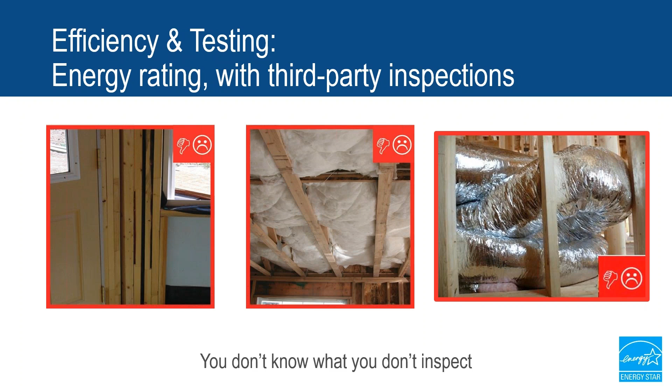Hopefully you're already familiar with ratings, but if you're not, here are the very basic steps as they apply to Energy Star. The third-party inspector, again called the rater, completes a preliminary energy model and Energy Star design review before construction even begins. During construction, the rater completes 2 on-site inspections to complete what is called an Energy Rating Index or ERI rating, and to verify additional Energy Star specific requirements.

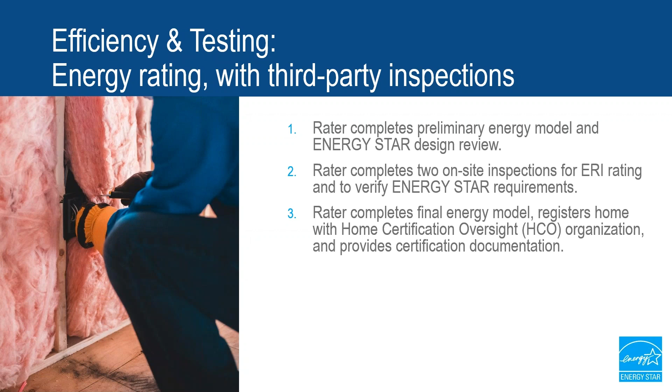Finally, the rater completes the energy model. They register the home with their Home Certification Oversight Organization, or HCO, and they provide documentation of certification to the builder. So doing an energy rating is an easy but critical first step. Every builder can, and I think should be doing an energy rating, otherwise you're just flying blind.

Fortunately, we know that a lot of builders have already taken this first step. More than 360,000 homes were rated in 2023 alone. Those were almost entirely new construction. Now, as I mentioned, these ratings result in an energy rating index, or ERI score, that represents the relative efficiency of a home. This is a scale roughly 0 to 100.

A high score represents a home that uses a lot of energy, meaning it's not efficient. And like golf, the lower the score, the better. A low ERI rating means the home uses less energy and is relatively more efficient. So for context, an ERI of 100 is equivalent to a home that meets the 2006 International Energy Conservation Code. And a score of 0 represents a home that uses no more energy than it produces. That means you can only achieve a score of 0 if the home has on-site power production like PV panels.

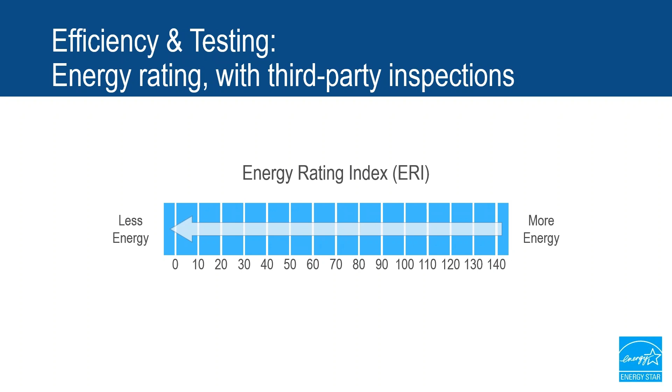In other words, an energy rating is simply an assessment. While it's a critical first step, it doesn't necessarily mean that the home is efficient. For example, a terrible home can also get an energy rating. It might get a score of 130. That's better than not knowing it's 130, but it doesn't necessarily make a good home.

Because of that, the Energy Star program goes beyond just doing an energy rating. We lock in above code performance. And in most states, we do this using what we call an Energy Star ERI target for each home. And this is important. Energy rating software will automatically determine this target for each home. Let me quickly show you how that's done.

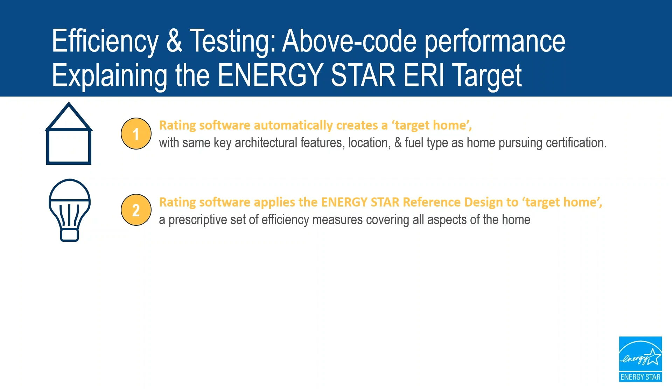Once the house pursuing certification is entered into rating software, the software automatically creates a target home with the same key architectural features like foundation type, conditioned floor area, number of stories, and orientation, as well as the same geographic location and fuel type. Next, the rating software applies what we call the Energy Star reference design to that target home. The Energy Star reference design is a prescriptive set of efficiency measures covering the house from top to bottom: insulation levels, infiltration, duct location, equipment appliance efficiency, etc.

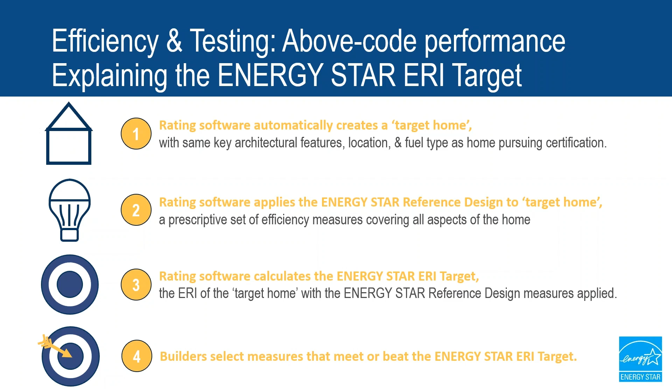Step 3, the rating software calculates the Energy Star ERI target, which is the ERI that results from the target home configured with that Energy Star reference design. Once the ERI target has been calculated, builders then select efficiency measures that meet or beat that ERI target. Note that this is the same process that the Zero Energy Ready Homes program uses to define its performance target as well.

So for example, let's say that you model a home you want to certify, and the software calculates that the Energy Star ERI target for that specific home is a 52. You then have to select efficiency measures that meet or beat 52 for this particular home to be certified. So none of those Energy Star reference design measures are mandatory for hitting the target, but if you're not going to use those, then you have to select other measures to compensate.

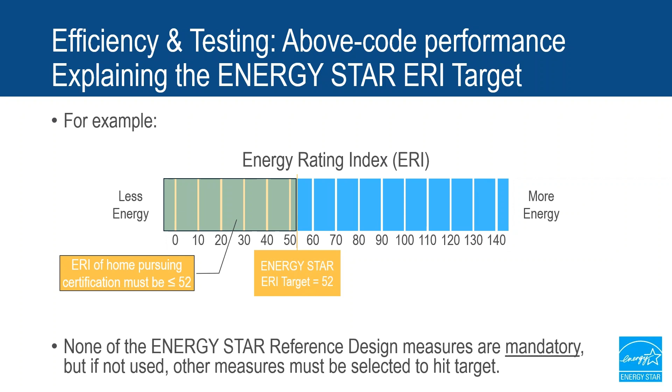So what are the typical Energy Star ERI targets? That depends on the program version. Our goal is to define targets that produce savings of at least 10% relative to code-built homes. For most states, single-family new homes, National Version 3.1 is in effect. These are the states shown in blue. It requires an ERI target of about 55 to 65 for most homes.

National Version 3.2, which is what we're focused on today, is implemented in states that have adopted the 2021 IECC or an equally rigorous code. Those are shown in yellow. Additional states will move to National 3.2 if they adopt the 2021 code, as we discussed. It will also be required in most states starting in 2025 if you want to step up to the tax credit. Now, 3.2 has a more stringent ERI target of about 45 to 55 for most homes.

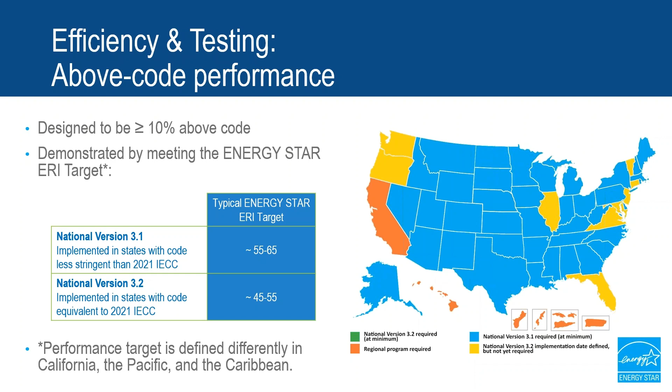And finally, some states have customized performance targets due to unique codes or building practices, and those are shown in orange, for example, California and Hawaii. So that is the foundation of the program, above code performance that's demonstrated through a third-party rating. If you're already doing that as a builder, you're more than halfway towards certification. On top of the efficiency that's locked in, we're just adding a handful of extra features. We're adding 3 comfort features.

The first is a complete thermal enclosure system, and that means a few things. First, having high enough insulation R values and high-performing windows to be effective. That's what we call the thermal backstop, and I'll talk more about that later in the presentation, so remember that term. Second, it means achieving grade 1 insulation installation. This helps a builder get the R value that they paid for and reduces the chances of comfort complaints. Third, it means air barriers and air sealing to help the insulation work properly, reduce hot and cold air from intruding into the home, and reduce pests. And fourth, it means using strategies to reduce thermal bridging in your walls.

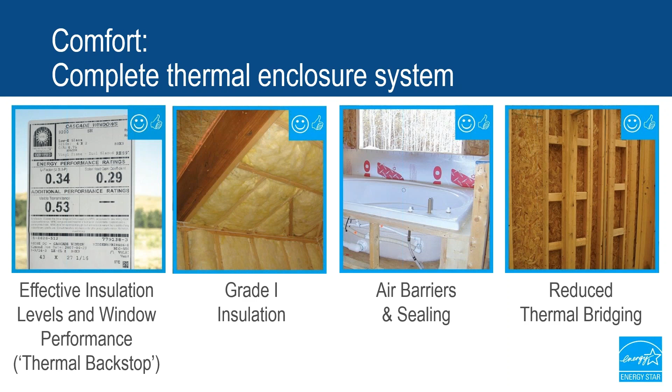The second of the comfort features is properly sized and installed HVAC systems. Unfortunately, this just cannot be taken for granted. Studies have shown that there's improper airflow in nearly 50% of systems, and incorrect refrigerant charge in 60 to 80% of systems. So pretty shocking statistics. You can't just assume that everything is okay. You actually need to check this.

Now, there are a few ways to accomplish this in the Energy Star program, but the best way is through HVAC grading. That's a series of 5 tasks that the rater completes, resulting in a grade for the HVAC system, either 1 meaning great, 2 meaning okay, or 3 meaning not great. You could say bad. For Energy Star, you have to achieve grade 1 or 2.

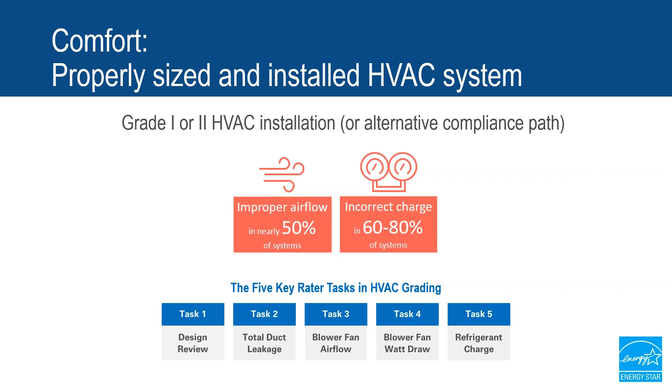The third comfort feature is bedrooms that are comfort balanced. You know, homeowners spend more time in their bedrooms than almost any other room, and when bedroom doors are closed, as they often are, air can become trapped. So it's not enough to supply conditioned air to each bedroom. That air also needs a path back to the HVAC system. There's a variety of ways to create a return air pathway, such as a transfer grill, jump ducts, dedicated returns, or, not as recommended, something as simple as undercut doors.

You know, there's a builder who we worked with for over 10 years who resisted this particular feature tooth and nail. They just didn't believe in the value of it. And then at some point, their in-house HVAC design team realized their HVAC systems just would not work as expected without the return air pathway. And so they ended up incorporating this feature into all of their homes nationwide, even when they weren't doing Energy Star. So this is actually important.

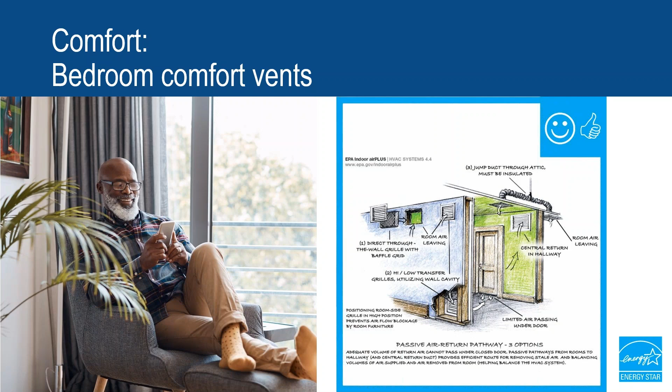We're adding, in addition to those comfort features, 4 air quality features, which are more valuable now than ever before. Because we're building a high performance home, we're going to build it tight and ventilate it right. And that means that we'll add a whole house fresh air system to deliver a consistent amount of air into the home. There's a variety of options to do this, from a bath fan with a special control to an inline supply fan, all the way up to something like an energy or heat recovery ventilator. All of those are acceptable.

But the point is, the system is going to have control over the air that enters the home instead of leaving it up to the whims of Mother Nature. This is now required by code in nearly half of all states anyways, but if it isn't required, it's really something you should be doing regardless for the health and the comfort of your home buyers.

So that was bringing fresh air in. The other half of the air quality equation is taking the bad air out. And so we'll add vented exhaust fans in the kitchen and in the full baths. Maybe you already know that cooking creates contaminants like formaldehyde, fine particulate matter, excessive water vapor. You're really kicking up a lot of bad stuff into the air.

There's a reason, if you think about it, that commercial kitchens have enormous range hoods with huge rooftop fans. In the home, range hoods that are installed in recirculation mode just blow those contaminants back in your face. So it might look good, but it's not really doing much for air quality. So we want those range hoods to be installed with ducts that go to the outdoors to get those contaminants completely out of the home. In some cases, they also have to meet sound limits.

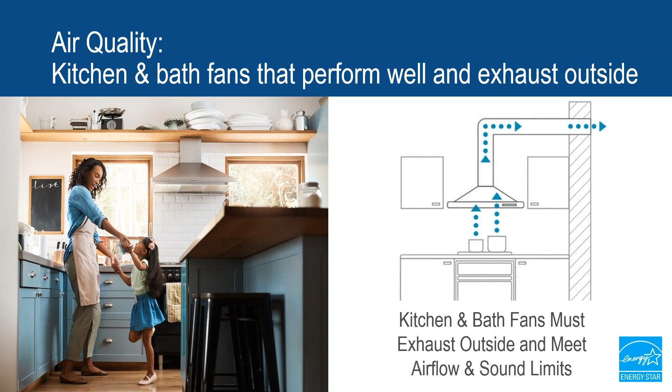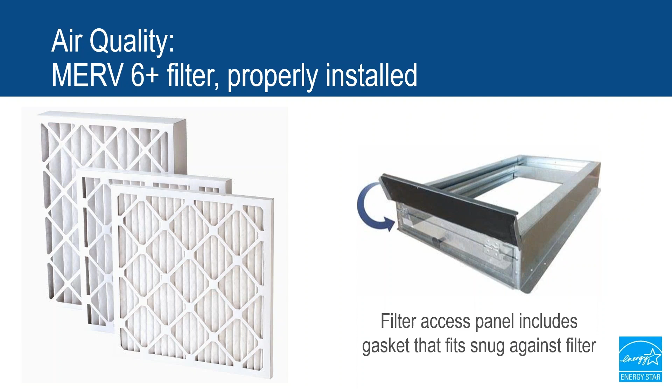Moving on, each Energy Star home and apartment includes a MERV 6 or better filter in the heating and cooling system, which is going to remove contaminants from the air as it passes through, and it has to be properly installed so that the air goes through the filter rather than around it. So that is pretty straightforward.

And the fourth air quality feature is combustion safety, which comes in a few different flavors. Most of our partners use power vented or direct vent appliances, or just use electric appliances that avoid the combustion altogether. Other options include keeping the combustion appliances outside the home's pressure boundary or having the rater do combustion safety testing. Whichever strategy you use as a builder, this is really just a question of due diligence to keep home buyers safe.

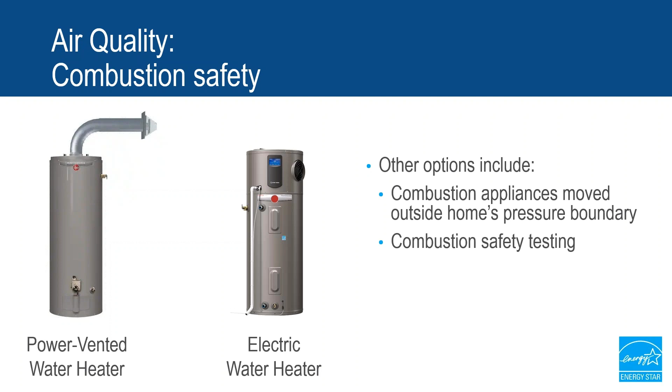And finally, we have one key durability feature, the water management system, which basically means proper flashing to keep bulk moisture draining away from your home. In other words, don't tuck your raincoat into your underwear. That is sound advice throughout your life, and it applies to buildings too. This is simply a list of details for the builder to implement. It's not a checklist to fill out.

And almost all of this is baked into code, so it's really not asking for much more than builders should already be doing. But we know it's super important for high performance homes because leaks and other moisture issues can be so damaging. And in fact, many of our partners go above and beyond these minimum requirements already, for example, by having third-party assessments.

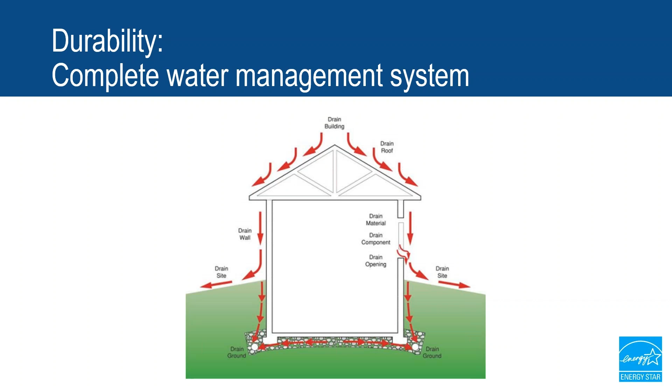So that's it. You can fit the Energy Star features on one page. It's an energy rating that locks in above code performance. That gets you halfway there with 3 added comfort features, 4 indoor air quality features, and a set of durability details. So ask yourself, which of these features would you tell your client to leave out, for example? Which would you leave out of your own home? Hopefully none of them. And just how hard and expensive would it be to add these features after the time of construction?

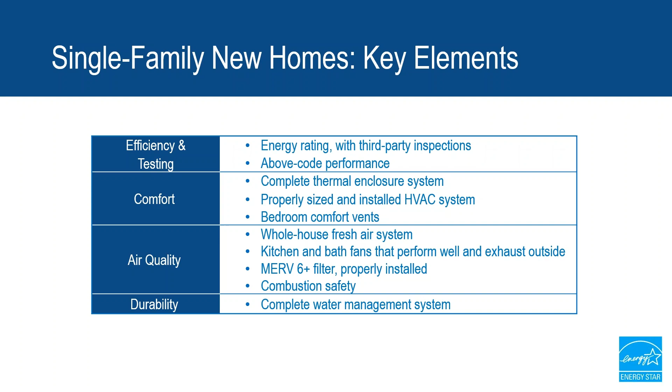Okay, that's that section. At this point, you already know 90% of what you need to do to comply with National Version 3.2 because the requirements we just reviewed are applicable to almost every version of the Single Family New Homes program. Now we'll get into what differentiates National Version 3.2 from earlier versions and how you can prepare to meet it.

Let me take a little breather here and do a poll. I just want to take your pulse with a poll question. So tell me, as of today, how familiar are you with National Version 3.2? A, we're strangers. This is the first time I'm hearing of it. B, we're generally acquainted. I have a basic understanding. Or C, we're best buds. I'm already assessing whether homes comply.

All right, so I'm going to let you weigh in here. All right, people are quick to the buzzer here. This is an easy question compared to the last one. At least 70% of you are still engaged with the webinar because you voted, so that's awesome.

It looks like we have a resounding answer here, which is B, we're generally acquainted. I have a basic understanding. Maybe a third of you or so are already assessing homes, which is great. And for 10% of you or so, this is the first time that you're hearing about it.

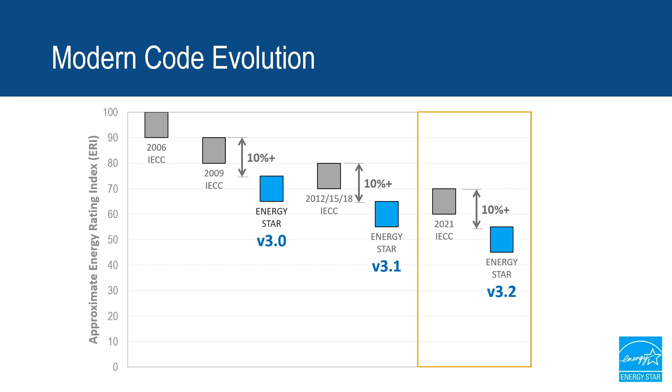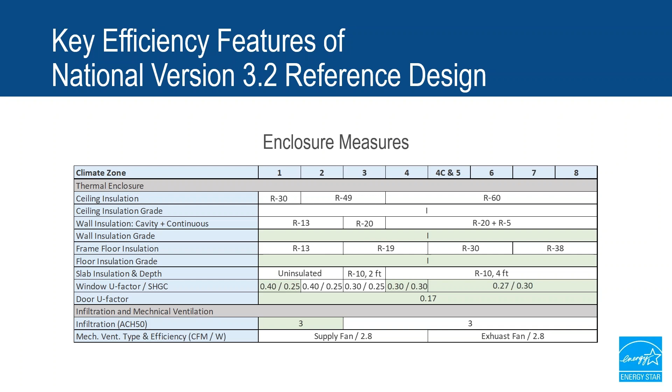So we start with insulation levels that are aligned with the 2021 IECC prescriptive path, achieving grade 1 insulation installation. That means it's properly installed insulation. Plus windows and doors that are aligned with the latest Energy Star product specs at the time that we were developing National Version 3.2, and infiltration of 3 ACH50 in all locations. Now let's talk about...

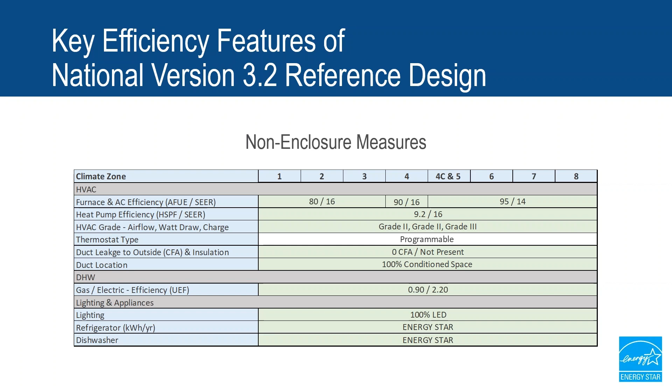It's going to be difficult to hit that target without several key features, namely the 2021 IECC insulation levels or equivalent, ducts in conditioned space, and an instant gas water heater or heat pump water heater. So you should start with the assumption that you'll need to include these three measures, and then if you don't want to use one or more of them, know that you're going to have to work pretty hard to avoid them. So let's explore trade-offs a little bit further, just to give you a little bit of intuition about this.

So first, I modeled a 2,400 square foot, 2-story home with a slab on grade and electric heating in Phoenix. So I'm going to give you a hot climate example here. I started by modeling a home with the same features as the version 3.2 Energy Star reference design. So those are the same features that you just saw a minute ago.

And lo and behold, the Energy Star ERI target for this home is a 50, which is squarely in that 45 to 55 range. And not surprisingly, the home that I modeled achieved a 49, again, because it basically has the same features as the reference design. So that would be one way to hit the ERI target: just use the same features as in the reference design. But let's say you didn't love that.

Next, I tried tweaking the insulation levels. Instead of 49, I dropped down to 38. But I improved the window performance a little bit to 0.32. And I backed off the infiltration to 4 ACH50. This worked fine. I was still able to hit the target of 50 with a little bit of room to spare.

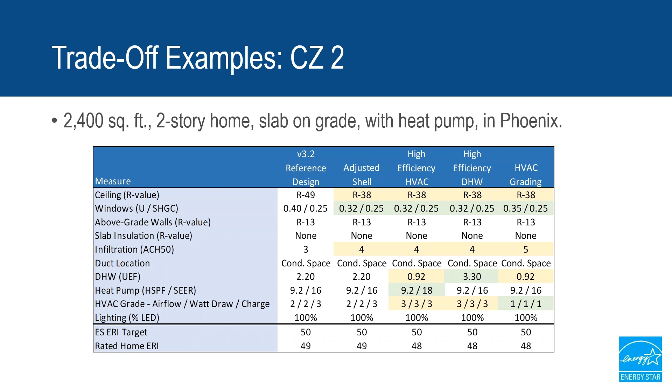That allowed me to take grade 3 HVAC again, the default, plus avoid any upgrade to the HVAC equipment itself. And finally, I invested in grade 1 HVAC, which allowed me to back off on the windows, the infiltration even further, and use the electric resistance water heater with room to spare. So HVAC grading gets you a lot of points in a hot climate where it's running all the time.

Okay, now let's look at a mixed climate. This is a conditioned basement home with a gas furnace in Baltimore. Using the same features as the version 3.2 Energy Star reference design, I get a 51 for this particular house, which is just a hair better than the target of 52.

Next, I tried tweaking the insulation levels again. Instead of R60, I backed off to R49. Instead of R20 plus R5 continuous insulation in the walls, I backed off to just R21 in the wall cavity. But I improved the window performance to 0.25 U factor. This worked fine, and I was still able to hit the 52 target.

Next, I stuck with the modified shell, but I upgraded the furnace to 95 AFUE. In exchange, I backed off the infiltration to 3.5 ACH50, and I took the default grade 3 for HVAC rating. That worked too.

My third package stuck with the modified shell, but it upgraded the water heater to Energy Star levels. That allowed me to still back off on the infiltration a little bit and take the grade 3 default for HVAC rating. And finally, I stuck with that modified shell, but I backed off on the AC a little bit, and I used grade 1 HVAC instead.

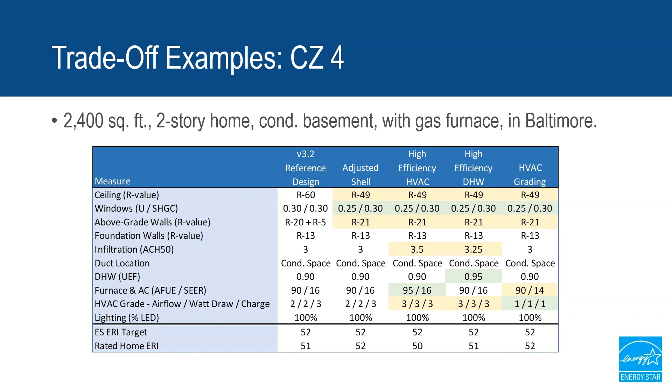And finally, let's take a look at a cold climate. This is a conditioned basement home with a gas furnace in St. Paul. So using the same features as the version 3.2 reference design, I get a 49, which is just a hair better than the target of 50.

Next, I tried tweaking the insulation levels again. So similar to Baltimore, I backed off from R60 to R49 in the ceiling, and I backed off to R21 in the walls. I improved the windows to 0.25 U factor, and I upgraded the foundation wall insulation to R21. This worked fine. I was still able to hit that 50 target.

Next, I stuck with the modified shell, but I upgraded the furnace to 96 AFUE. In exchange, I backed off the infiltration a little bit to 3.25, and I took the default grade 3 for HVAC rating. That worked too.

My third package stuck with the modified shell, but upgraded the water heater to Energy Star levels. That allowed me to still back off on the infiltration a little bit and take the grade 3 HVAC. And then finally, I stuck with the modified shell, but I backed off on the infiltration a bit, and I used the grade 1 HVAC installation instead.

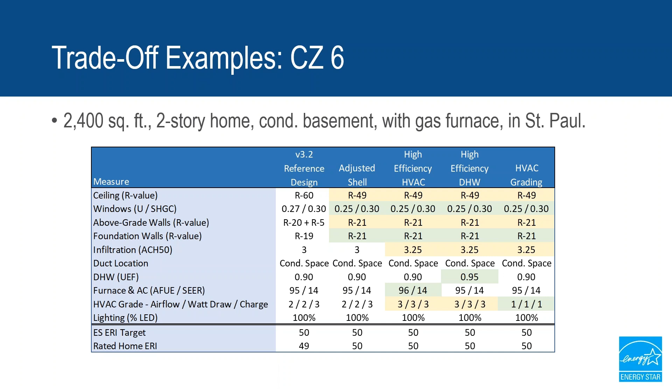So you can see with all of these examples that you do have some flexibility to adjust things at the margins, but I think you'll find that you can't leave out key features like ducts in conditioned space unless you're really going to double down on everything else. Okay, so hopefully that gives you just a little bit of intuition, if you didn't have any before, on the ERI targets for version 3.2 and how you can still mix and match measures to hit those targets.

So the more rigorous ERI target is the first difference between National 3.2 and the prior versions, and the second key difference between National version 3.2 and version 3.1 is a more stringent thermal backstop. As we discussed in the last section, one of the components of a complete thermal enclosure system is this thermal backstop. This is the minimum amount of insulation and the minimum window performance that has to be met in order for the home to be certified.

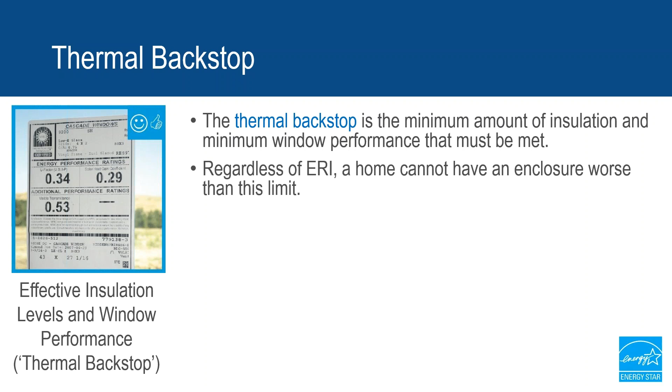So regardless of how good the ERI is, you can't have an enclosure that's worse than this and still certify the home. But a home can trade off between ceiling, wall, and foundation insulation, windows, and door performance to meet this thermal backstop.

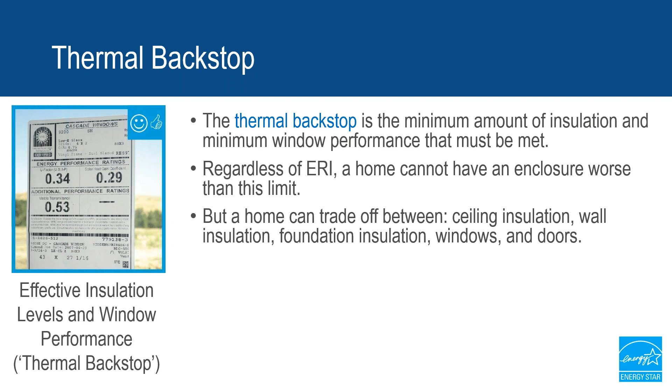Now, more precisely, the thermal backstop can be defined by a single number for a particular house, which is the area-weighted U factor for the entire enclosure. You simply multiply the U factor for each assembly by its area, and you sum those numbers up. You'll sometimes see this number referred to as the building UA value. Now, I know that UA is a little bit geeky, so I just want to quickly show you some examples to help you understand the concept.

These calculations were done on a 2,400 square foot two-story home with 15% window area to floor area ratio. And let's start with windows and show you a couple examples. When we say UA, we literally mean multiplying the U value, or 0.35 in this case, by the area, or 360 square feet, to get the UA value of 126. Like ERI scores, the lower the better. So you can see that as we improve the window, the UA gets lower.

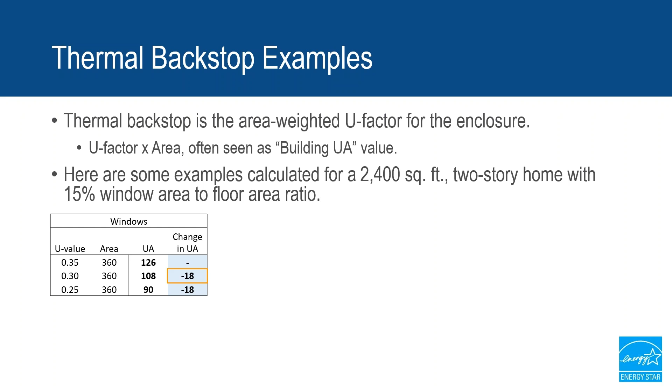Now pay attention to how much the UA is changing when we improve the window U value from 0.35 to 0.3 and then down to 0.25. The change in UA is 18, and that's a big change because sadly windows have the equivalent of very low R values. So small improvements to the window make a big difference in the UA.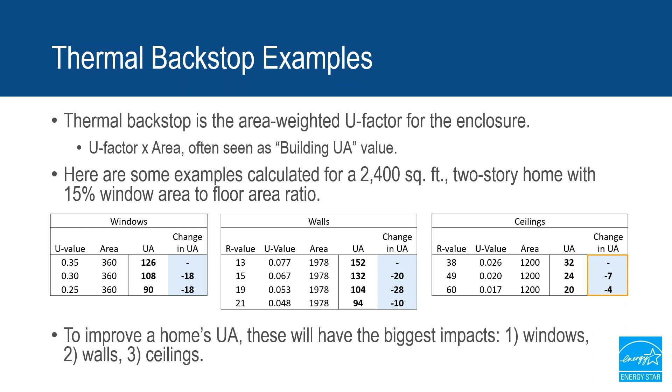And finally, let's take a look at ceilings. Insulation levels are pretty high to begin with, so increasing the R value in the ceiling even further has a pretty modest impact on UA. In short, if you want to improve your UA, you'll get the most bang for your buck from improving the windows first, and then the walls, and then the ceilings. Hopefully that kind of makes sense.

So what are the thermal backstops of the Energy Star program? Under National version 3.1 of the program, the thermal backstop is tied to 100% of the UA of the 2009 IECC prescriptive path. For homes certified using version 3.2, the thermal backstop is more stringent. It's aligned with the 2021 IECC prescriptive levels. For homes that are permitted before January 1st of 2025 and certified using 3.2, a thermal backstop of 105% of the UA from the 2021 IECC is allowed. And then for homes that are permitted after that date, it drops down to 100% of the UA.

The next group is climate zones 5 through 8, which I'd call moderate changes. The requirements are essentially the same for all 4 zones under the 2021 IECC. The 0.3 windows that are there, they're probably what most of our partners are already using today or close to using today. The R60 ceiling is a significant jump, but from relatively high levels to begin with, which means a smaller thermal impact. I'd say the same deal for the walls. And the foundation insulation increases, they're not nothing, but they're not unheard of either.

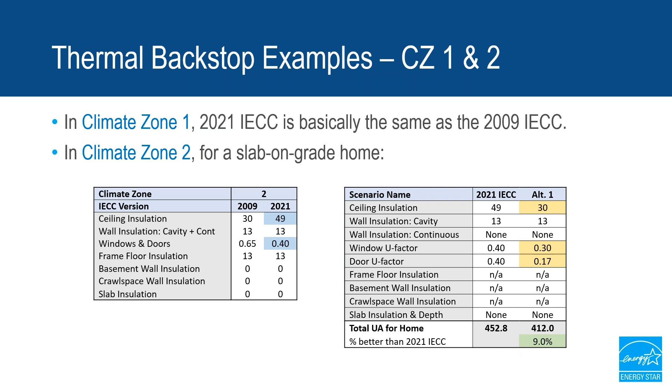Here I've downgraded back to R30 ceiling insulation, but I've added insulated doors and 0.3 U value windows. That not only meets the 2021 IECC UA, it's actually 9% better than it. You see that? So the 2021 IECC UA for this particular house is about 453, and the alternative I just showed you is 412, lower is better. So this would be perfectly fine. That's why I think most partners are not going to have a lot of trouble hitting the 2021 IECC UA in climate zones 1 and 2.

Now let's move on to the moderate group, climate zones 5 through 8. Now in the 2021 IECC, the thermal enclosure is identical in these locations except for the floor insulation being a bit higher in climate zone 7 and 8. So climate zone 5 is a good representative example. Let's take a look at a home with a conditioned basement. So in climate zone 5, the 2021 IECC has increased requirements almost across the board. Again, one option would be to just use these higher levels and you'd be all set. But let's say you want some trade-off options.

First, let's say that you're certifying a home with version 3.2, but it's permitted before 2025. That means you can use the less stringent interim thermal backstop. And you can do that with maybe R49. Say you're not ready for R60, but you can do that much. You can do R21 in the walls, but not continuous insulation yet. And you can bump your windows down to 0.29, and you can upgrade your basement wall to R19. This wouldn't hit the 2021 IECC UA. It would actually be about 4% worse. But because the home is permitted before 2025, that would be good enough to certify the home. So that's a good stepping stone.

Now, if the home is certified under version 3.2, but it's permitted after 2025, then you're going to have to do a little bit better. So say you're okay with upgrading the attic to R60, but you don't want to add any continuous wall insulation, and so you stick with a high density batt product. If you use the same insulation in the basement walls and you make another modest window upgrade, you're there. You've just squeaked by. What if R60 is a step too far? You want to go back down to R49. Instead, you're going to add a little bit more to the 2x6 wall assembly and go with R23. You pair that with the same modest window upgrade, and that also works.

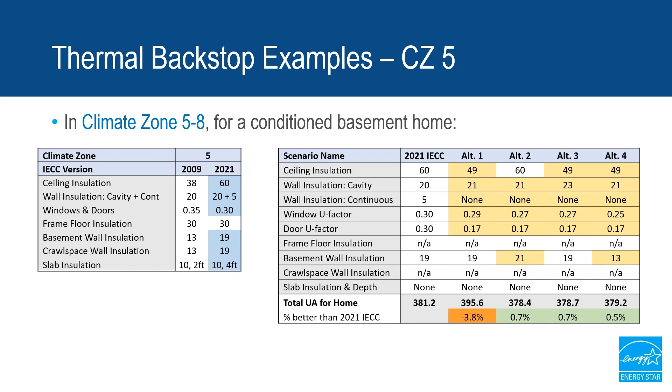Okay, now let's look at the final group, which has some major upgrades, climate zone 3 and 4. Let's start with climate zone 3 and use a slab on grade home. The two notable things about the 2021 IECC in this location is the upgrade to a 2x6 wall assembly and the addition of slab insulation. So if you can incorporate those two changes, you're all set. What if not? Well, let's start with another interim solution for homes permitted before 2025.

If you're not ready for 2x6 walls or you're not ready for slab insulation, but you can get a little bit of continuous insulation on the 2x4 wall, as some of our partners are already doing in places like Dallas, then you're already pretty good to go. You're just scraping by at 5% worse than the 2021 IECC, but that is good enough for the time being. Once you hit 2025, you have a few paths that you can take. The first is to stick with the enhanced 2x4 wall assembly, but tweak your window

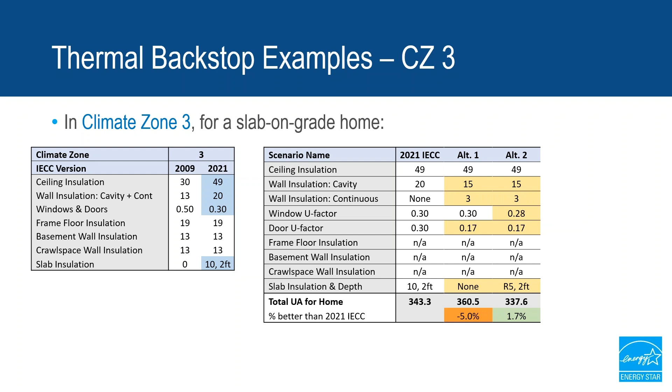2025 might be as easy as a 2x6 wall with high density insulation and a tweak to your windows, and you are good to go. After 2025, if you're able to do highly insulated 2x6 wall cavities and stick with the R60 in the attic, then a modest window upgrade will get you the rest of the way there. And again, if you can really push the window performance, in this case to 0.24, then that makes for a pretty conventional ceiling and 2x6 wall assembly, with a little room to spare, I might add.

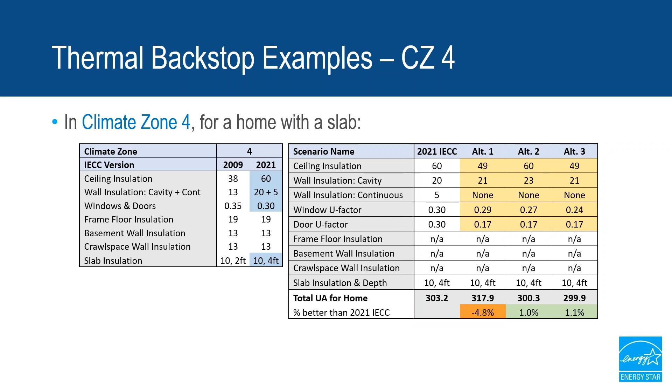So my scenario is my final option used very efficient windows, typically a U-factor of 0.24 or 0.25. And I'm really encouraging our partners to take a close look at windows, particularly for mixed and cold climates. While windows with this level of performance may have been rare in the past, I think that's a market that will quickly evolve.

That's because a new product specification for Energy Star residential windows, doors, and skylights went into effect last October. And I think that's going to increase the availability of efficient double and triple pane windows. That's because the Energy Star window spec has a really high market penetration. The most recent estimate from 2020 was that 84% of windows shipped in the US were Energy Star certified.

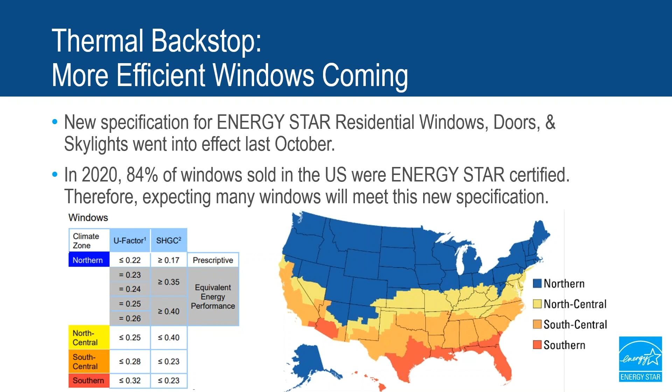Okay, it is time for a quick pop quiz. First up, hopefully you've been paying attention here, what's the key difference between version 3.1 and 3.2? Is it option A, you have to meet a more stringent ERI target? Is it option B, you have to meet a more stringent ERI target and a new thermal backstop? Or is it option C, battery storage is required in every home?

So I'm gonna just wait here until a majority of people have chimed in. Percentages are going up very quickly. Everyone's doing a good job. Okay, more than 2/3 of you have responded, and almost all of you got the right answer, which is B. For version 3.2, you have to meet a more stringent ERI target and a new thermal backstop. Okay, so great, you're definitely paying attention here.

Next question, what's the typical range of ERI targets for the national version 3.2? Is it A, about 0 to 10 for every house? Is it B, exactly 50 for every home? Or is it C, about 45 to 55 for most homes? Okay, a lot of quick responses here. All right, over 60% of you have responded. I'll let some of you think about it for another minute or two.